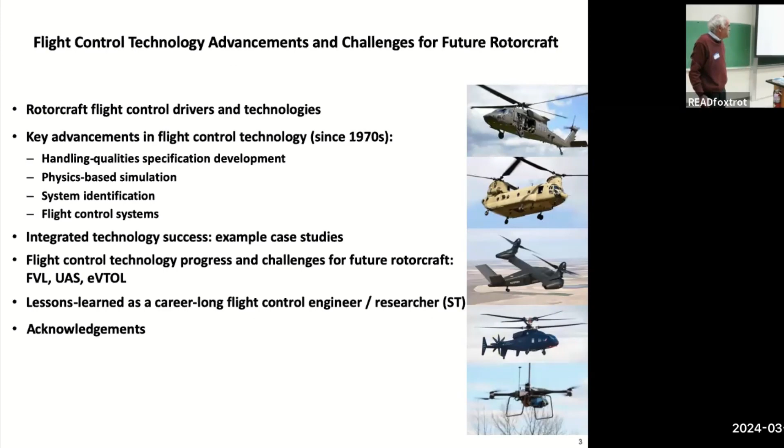This is an outline of my presentation. I'm going to march through this as I go, so I won't walk you through it here. The first topic will be rotorcraft flight control drivers and technology — what makes rotorcraft special and different from their fixed-wing counterparts?

A number of things: first, rotorcraft are high order, highly coupled — there are multiple dynamic systems that are dynamically coupled to each other. The aircraft has a lot of pitch-roll coupling, so it's not a single input, single output system at all. This requires engineers to have broad multidisciplinary expertise to understand how these things work together. The aircraft is also highly unstable and has significant time delays.

As a result of all this, if you look at it in terms of a Bode plot, we see this in the roll response — the rotor dynamics and the fuselage dynamics are in the same frequency range. What that means, if you look at it in terms of a root locus plot, is you have a second order system representing the fuselage and rotor dynamics. If you ignore the time delay, you think you can close the loop very tightly, but in reality there's another mode here called the lead lag mode.

There's a lead lag mode, and even for small amounts of time delay, the rotor will go unstable. So what that means is we need accurate models to do the design and development, and we need transparent design and development methods.

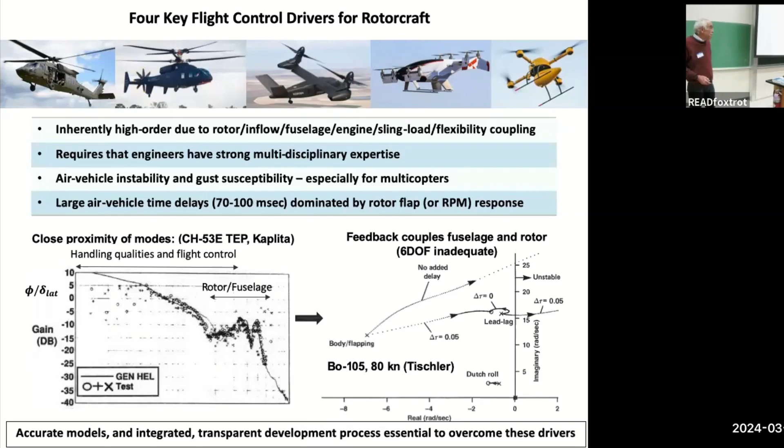So let's talk about 4 major areas of technology development over the last 50 years.

First area is handling quality development, and a good reference for this is a Nikolsky paper by Professor Padfield. Handling quality specifications basically define how you want the aircraft to fly to give you good response characteristics. Fixed wing folks came up with an update to their spec, called 8785C, developed in 1980. One of the big innovations was they moved from the time domain to the frequency domain.

In the rotorcraft area, we did the same thing, and proposed that we moved all of our specifications into the frequency domain. We had a lot of collaborative partners. ADS-33 was released after 20 years of work, so it was a very long process, and then the flight test guides came along.

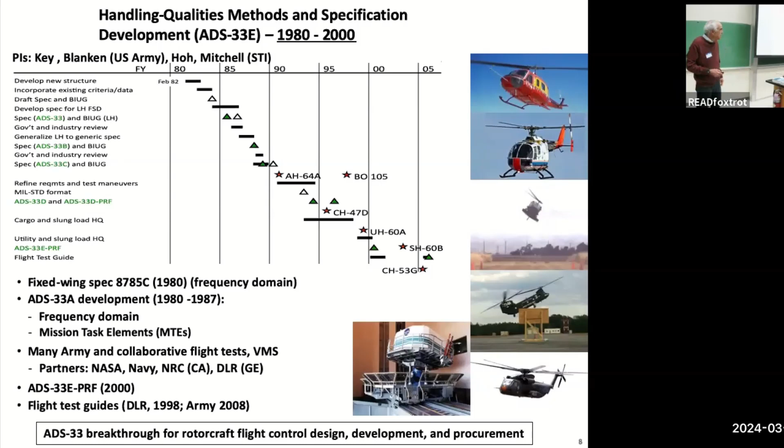ADS-33 was a huge breakthrough because it provided design guidance for folks wanting to figure out how the aircraft should fly, so that the pilot or control system will like the way it's operating. One of the first hurdles was moving into the frequency domain, and there were a lot of folks that questioned whether frequency domain characterization was applicable and practical.

So I was the first one to actually do system identification in the frequency domain on rotorcraft. It had been done in fixed wing, but not before rotorcraft. The first application was flight testing I conducted on the XV-15, and then following on the Bell 214.

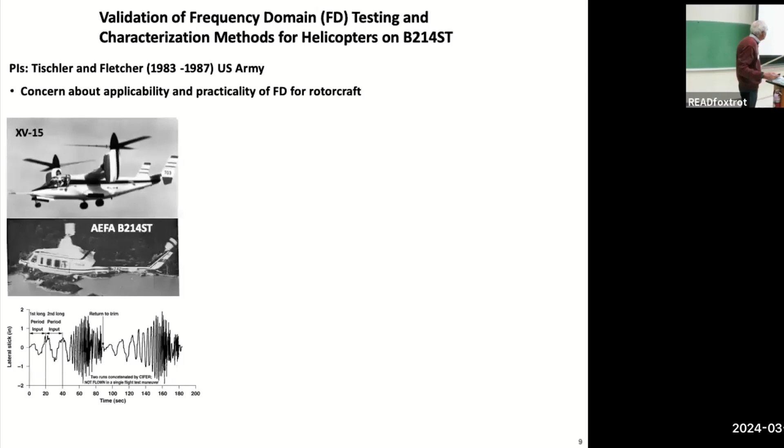What happens is you do one of these frequency sweeps. This one's pilot generated, but it can be computer generated. You get another one of these Bode plots, so you have magnitude, phase, and coherence.

Coherence tells you about linearity, and what it shows you is that the aircraft over a very wide frequency range is highly linear. That means the input to output response is quite linear. Now, it may have local nonlinearity, but if you look at it from the standpoint of a dynamic system, it's highly linear. Not only is it highly linear, but even though it's got a lot of dynamic modes, you can represent it over a very wide frequency range with just a simple second order transfer function.

When you do that, and you look at it in the time domain afterward, you can see that the prediction is very, very good. In the top right there, the model tracks the flight data very well.

Then you basically take this Bode plot and you can pull off some of the specification parameters like the bandwidth and the equivalent phase delay and so forth. These are how you specify the aircraft response characteristics. This demonstrated that we could use frequency domain characterization, and that's in fact how all handling qualities are represented now. The frequency sweep flight test manual told the flight test community how to do these tests in a safe way.

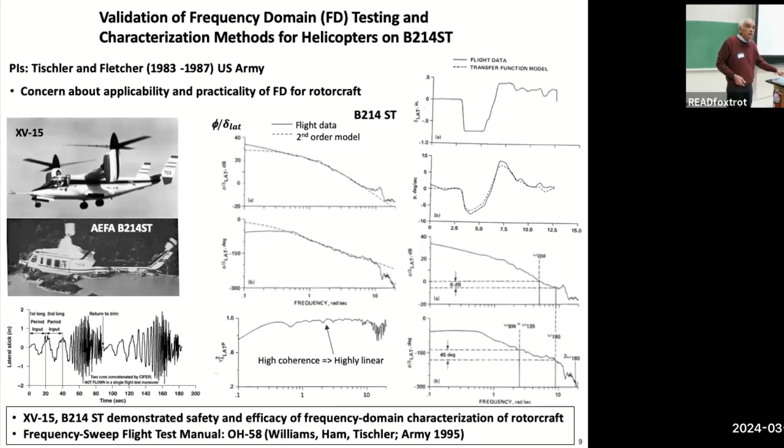The next major area we had to tackle was understanding the effect of time delay. The effects of time delay were very well known in the fixed wing community, and there was work published that shows that if you have about 120 milliseconds of time delay, the handling qualities start to break down.

What we're after is a Cooper-Harper rating, given by the pilot, of 3.5 or less. That's called level 1, or good handling quality. If you have large amounts of time delay, the handling quality degrades. The pilot is not able to fly it well, and he gets into what's called a pilot-induced oscillation.

The very first fly-by-wire aircraft is one that I worked on, called the ADOCS, and it had very large time delays. Sure enough, every time the pilot would try to do a high gain or aggressive task like a slope landing or a run-on landing, the pilot would get into a PIO, pilot-induced oscillation, and lose control of the aircraft, and the aircraft would trip offline.

So what that meant was we had to be very careful about these time delays. They are really fundamental, not only to the feedback system, but also to the ability of a pilot to fly it, or even an automation system.

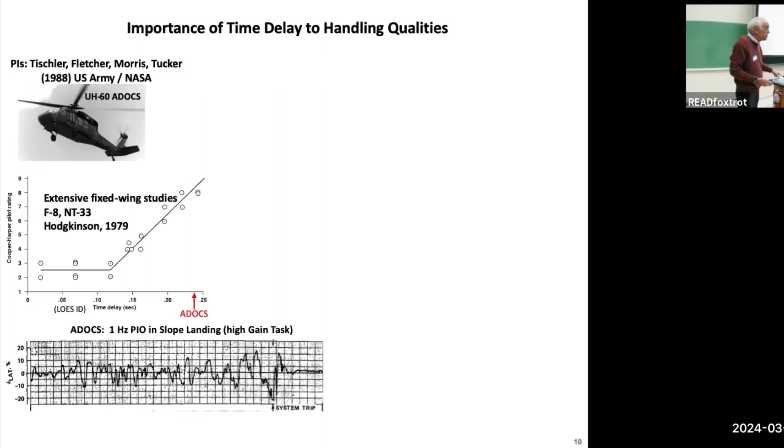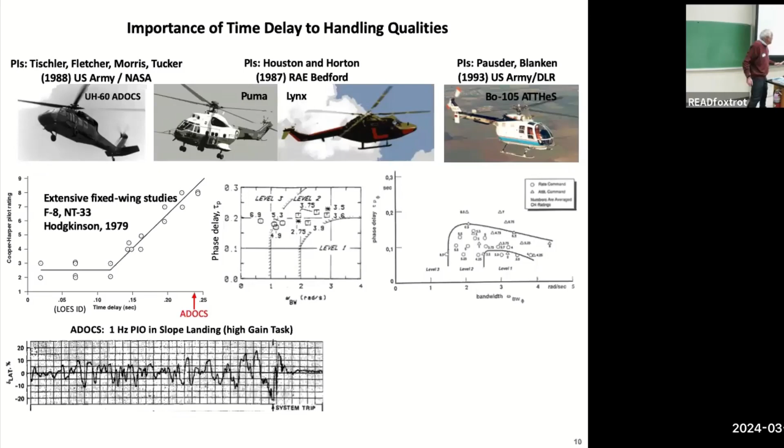There are other people in Britain who looked at parametric studies of the effects of time delay. Then there was a very good study done collaboratively between the Army and DLR in Germany, which indicated that the break point for time delay was 120 milliseconds, which actually lines up exactly with the fixed wing. You'll see throughout this talk many places where the fixed wing people started, then the rotorcraft community came along, and there was a great deal of similarity.

As a result of this, the spec emerged. Here's one of these specs I've been talking about. For example, you pull off the bandwidth, which is the point at which the curves roll off versus phase delay. Initially it allowed for very large time delays, 200 and 300 milliseconds, but eventually it was capped at 120 milliseconds, just like the fixed wing and rotary wing folks did. So you'll see throughout my talk that effective time delays are a big deal.

Time delays arrive not only from digital system delays, which are actually not the largest sources, but the biggest sources of time delay are things like the response to rotor RPM, if you have one of these air taxis we're talking about, filters, and especially the actuator rate limit, which creates a very large equivalent time delay.

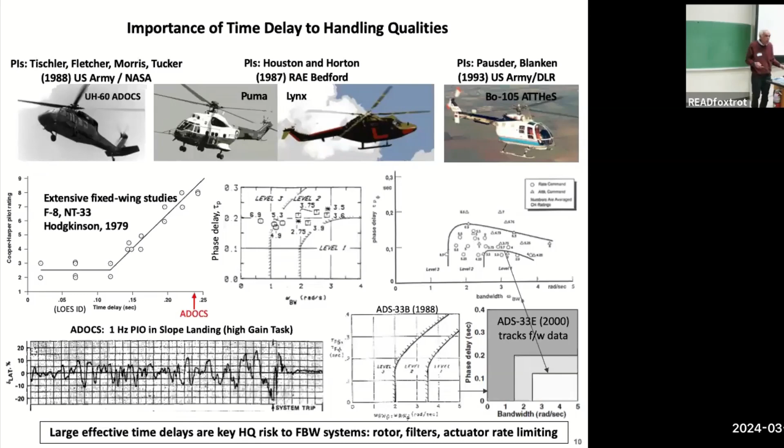The next important area was understanding the effect of disturbances on the aircraft response, and coming up with a spec to define how well the aircraft rejected disturbances and how it's positioned in space. What we used for this was the classic sensitivity function of 1/(1+GH), which you learn in fundamental control. You basically put a sweep into the hold variable.

In this case it was the roll angle hold. This is a control system - we're seeing a lot of what's called explicit model following, which basically holds the roll angle. If you turn the gain up, you measure the minus 3 dB point, and that defines what's called the disturbance rejection bandwidth.

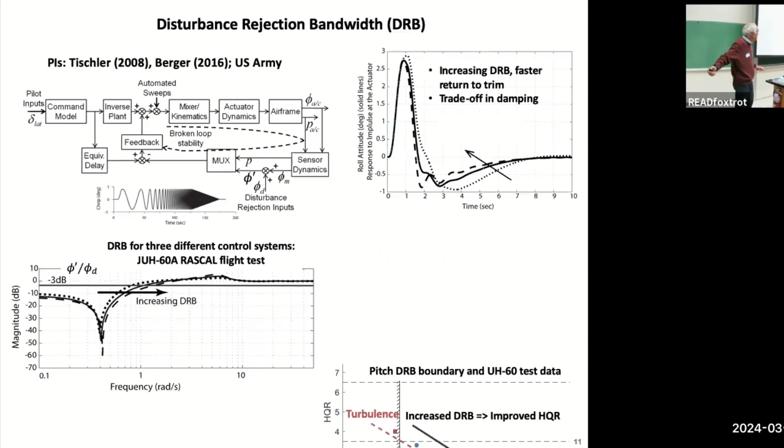This is a very good spec for characterizing how well the aircraft holds its trim and returns to trim. As you close the loop tighter, the curve moves across and you get more peaking, meaning it starts to become oscillatory. The aircraft will return to trim faster, but becomes more oscillatory - so there's a trade-off between speed of response and stability.

There was a very nice collection of results developed by Tom Berger at the Army. He showed that if you fly the aircraft in very calm conditions, you don't need much feedback gain or much disturbance rejection bandwidth. But as soon as you fly these rotorcraft in turbulence, what used to be a good aircraft - remember, Cooper-Harper rating 3.5 - becomes bad, and you can improve it to level 1 by turning up the feedback gains and making the aircraft respond better.

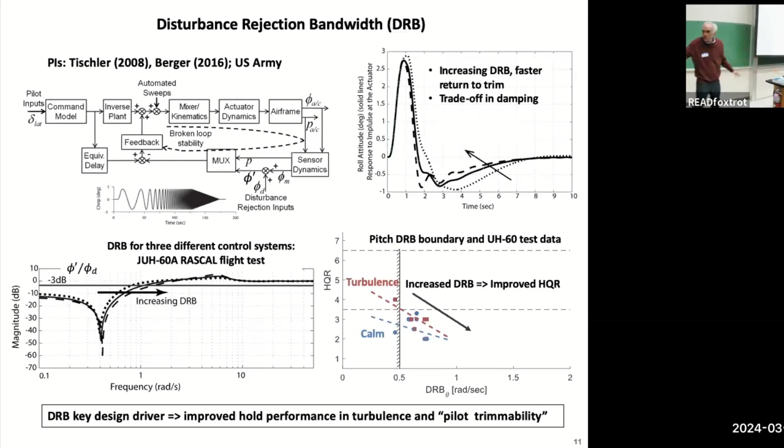So it turns out that this disturbance rejection bandwidth is a key driver for flight.

There were a lot of aircraft designed to meet ADS-33, the design spec. You see a wide number of these, both in the United States and, in fact, the very first fly-by-wire helicopter designed to meet ADS-33 was an NH-90. If you go online on YouTube, there are amazing videos of this aircraft landing on a Navy ship - a European ship in a very high sea state, very difficult conditions. They designed the aircraft to meet ADS-33, and it flew extremely well.

It turns out that not only military aircraft use ADS-33, but it's also being widely used for commercial aircraft. We'll see this as we go forward and start talking about eVTOLs - these new aircraft will also be designed to meet the same requirements, because this is really the only source of dynamic and handling quality requirements for rotorcraft.

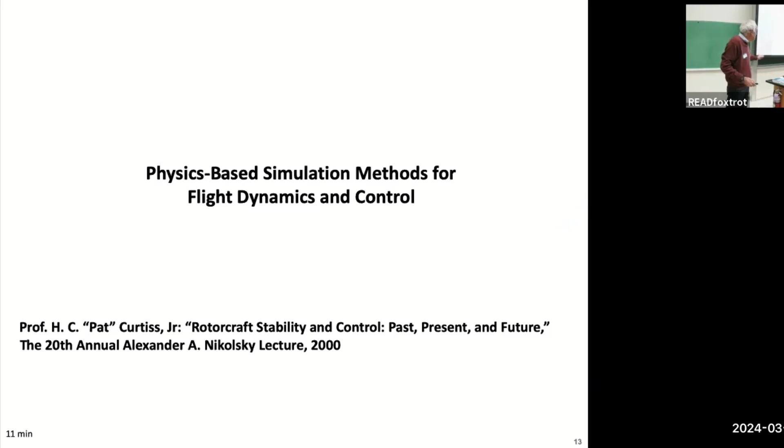Now I want to talk about the next topic, which is physics-based modeling. A good reference for this is Professor Pat Curtiss and his Nikolsky Lecture.

Physics-based modeling started out in the 1970s with what's called a tip path plane model. Bob Chen's tip path plane basically models the rotor as a disk, and you write very simple equations for the disk in space. This was a good starting point for not only real time but also offline flight control design, but it was crude.

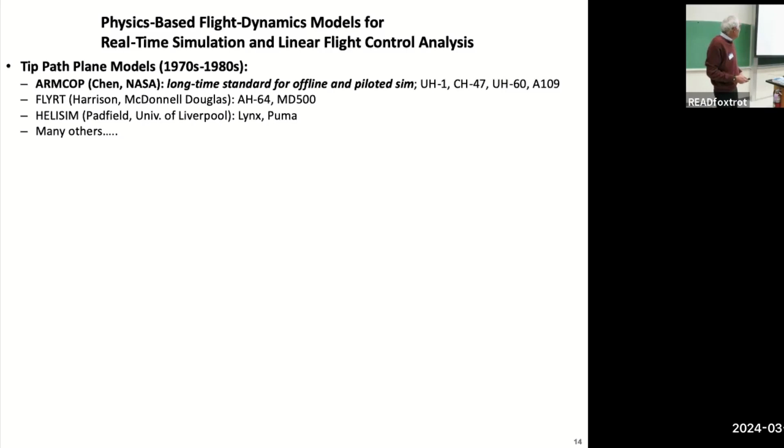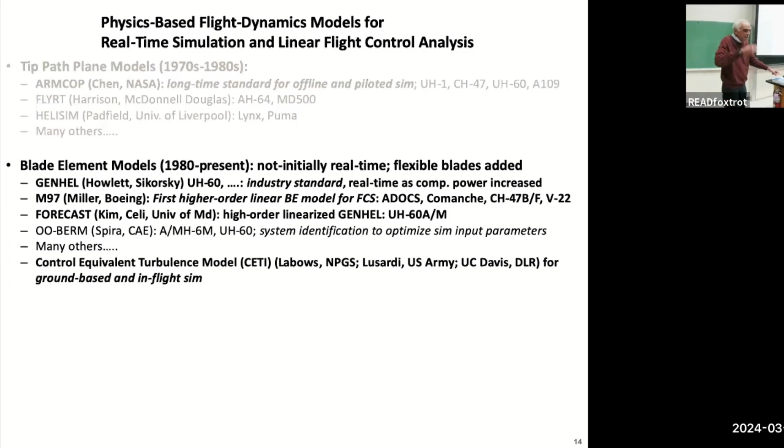The next series of models that came along were blade element models. With blade element models, you basically segment the rotor into a whole series of small elements and sum up all the forces and moments. The pioneer for this is a fellow named Jim Howlett from Sikorsky, who developed the GenHel program. Then Boeing came along and figured out how to linearize GenHel, which initially was only a time marching simulation. Eventually these models included flexible blades, and after that work, we actually linearized GenHel.

There are many other models. Another one is in Canada, a leader in simulation and pilot simulation is CAE Canada, and many others.

In addition to these models of the aircraft response, we also have to get models of how the aircraft responds to turbulence. This is important because of the Dryden model, which you probably learned about. It works in forward flight for fixed wing, and it works for rotorcraft in forward flight, but in hover it breaks down - in fact it blows up because it has velocity in the denominator. So we came up with the concept of a control equivalent turbulence model that basically feeds shaped turbulence directly into the actuators. We've seen this a lot because turbulence is one of the main drivers for control system design and work.

The next major development was incorporation of higher order aero. We started out with things like what's called prescribed wake, where you have the rotor shedding a wake, and you can assume it has a certain form that makes it prescribed. This allowed researchers from the Technion in Israel to understand the angular cross coupling, which had to do with wake distortion.

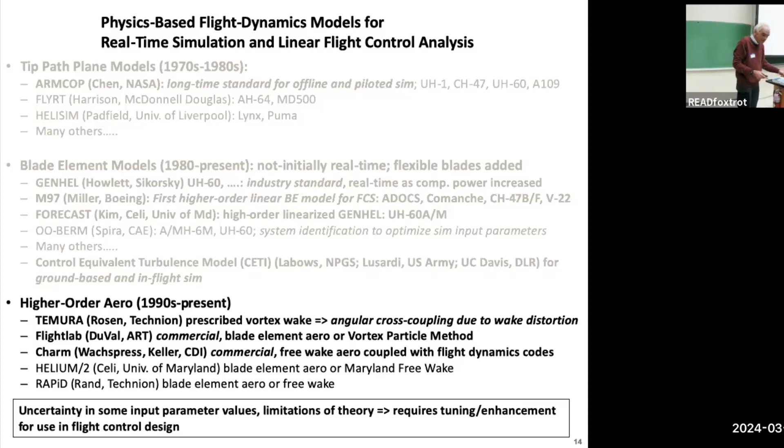And you really can't do it in the time domain. Originally, that's the way people would look at it, trying to look at these wiggly curves and see how close they were - it's very hard to do. If you look at the frequency domain, you can look at it frequency by frequency, and it allows you to understand what the accuracy of the model is and whether you're improving it.

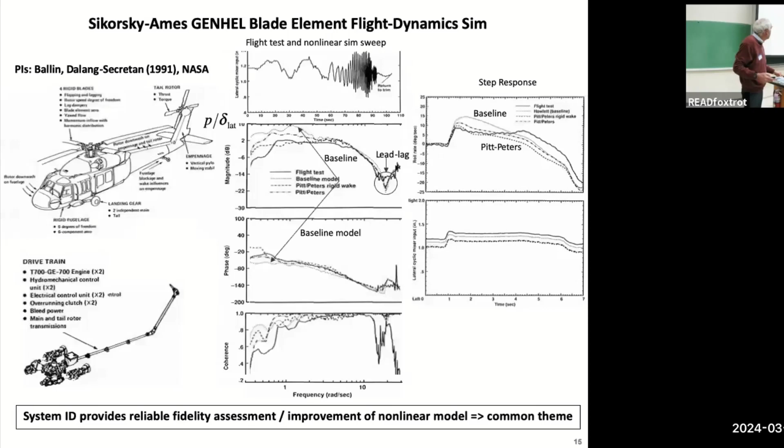The next area of simulation modeling I want to talk about is what's called a stitch model. If you do the system identification, one of the results is that you can extract the state space model of the aircraft. So not only do you get the Bode plots, and I'll talk about this in a moment, you get stability derivatives, but you can also get stability and control derivatives from a nonlinear simulation. You have to do numerical perturbation and linearize the equations of motion. Basically, you can build a lookup table in which the ABCD matrices are stored as a function of velocity, at several discrete points.

You make a lookup table of the stability derivatives, the control derivatives, and the trim data. Then all you have to do as the aircraft flies in simulation is tell it what speed you're at and what your control is, and it calculates the forces and moments. It adds to the aero forces the gravity forces and moments, and then drives the equations of motion. This is very effective and widely used now as a way of building simulation models when you don't have a physics-based model.

A lot of companies are doing this—companies like CAE and NRC—they just instrument the aircraft, fly it, get system ID results for several point conditions, and then build a lookup table and interpolate it. These are called quasi-linear parameter varying—basically linear at the anchor points, but interpolated in between.

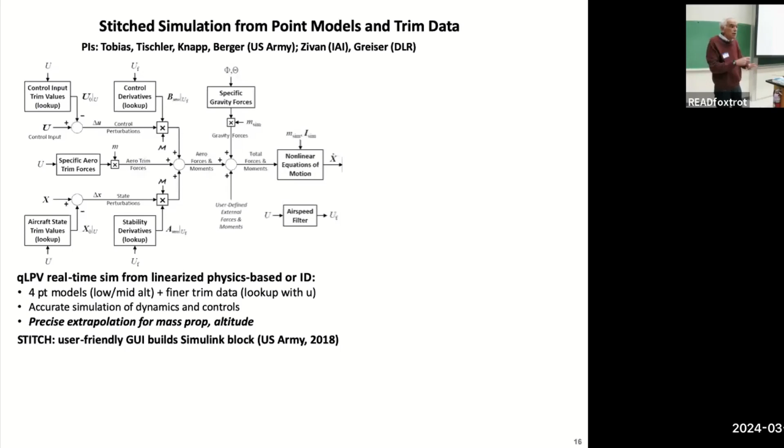We developed a tool called Stitch in the Army, which builds these for you automatically. One of the nice things about this is it allows you to do precise extrapolation for changes in mass, CG, and moment of inertia, so you don't have to test it for every one of those points. You only have to test 4 velocities at low altitude and 4 velocities at mid altitude, and you can characterize the entire envelope of the aircraft and build an entire simulation.

Here's an example of how accurate this is. Using the GENHEL model, which we linearized, we had essentially a truth model. We flew the nonlinear simulation from hover forward to 100 knots, turned back to hover, and compared that with what we'd get using one of these Stitch models, the linearized point models. It's essentially perfect—there's a small offset in actuator, but all the dynamics are perfectly modeled. So you can represent these very complex systems with a very small number of point models, and it works extremely well.

As I said, this is widely used in development of training simulators, and it's really ideal for UAVs, because UAVs are changing so rapidly that it's much easier to go out and fly it, do system ID, and build yourself a lookup.

There was a lot of work in a working group that I led over a 4-year period, involving multiple NATO countries and a wide variety of aircraft, looking at how to assess the fidelity of simulation models in the frequency and time domain, and then how to improve them. If you're interested in this topic of figuring out how to assess fidelity, this is a good open literature report—you can Google it and find it online. It goes through a variety of methods, from very simple to very complex, explaining how to assess and update.

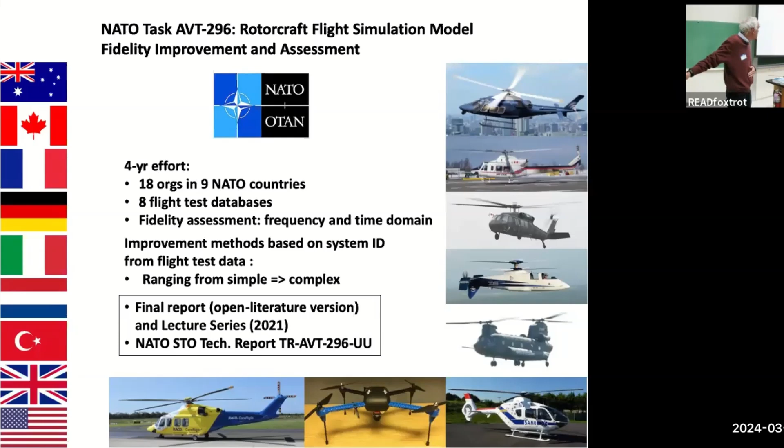I want to switch now and talk about system identification. I've introduced you a little bit to what it is, and a reference for this is my textbook on the topic. System identification basically has you excite the aircraft, measure the excitation, the control, the actuator input, and the aircraft response, and it extracts equations of motion. That's what system ID is.

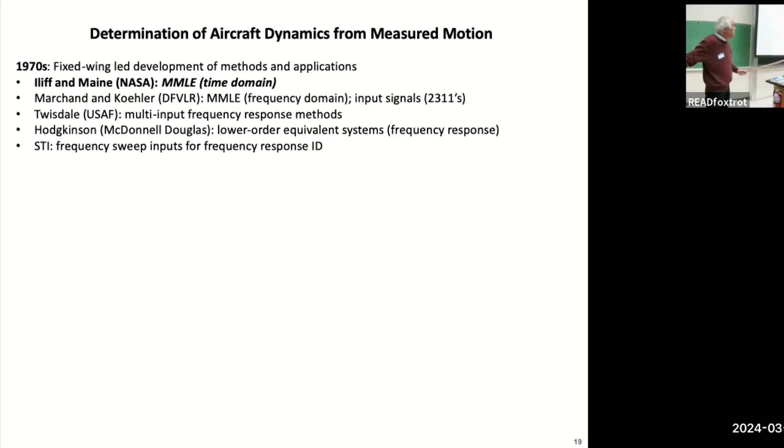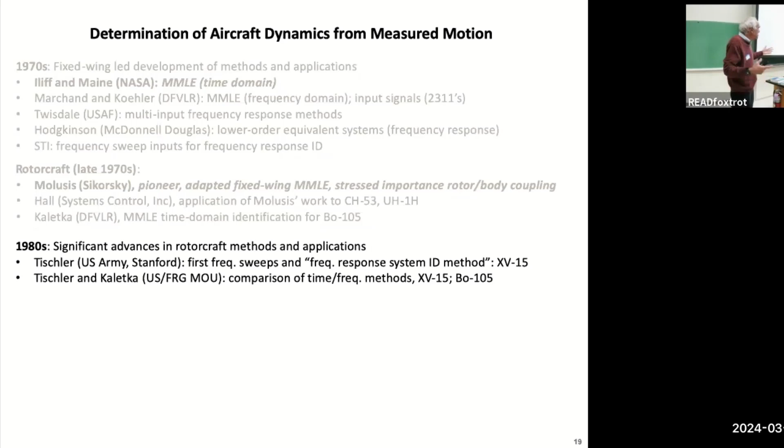System ID came along—fixed-wing people had a big jump on us at NASA, through 2 pioneers called Iliff and Maine. At NASA Dryden, they developed a time-domain method called MMLE. This was later applied to rotorcraft in the time domain by Molusis from Sikorsky, and then others in Germany and industry. I came along in the 1980s when I joined the Army and was the first to use frequency sweeps, developing a method called the frequency response system identification method. I applied it initially to the XV-15, and then many other aircraft, including the Bo-105, and a very large number of aircraft since—it's probably the largest, single most widely used approach now worldwide.

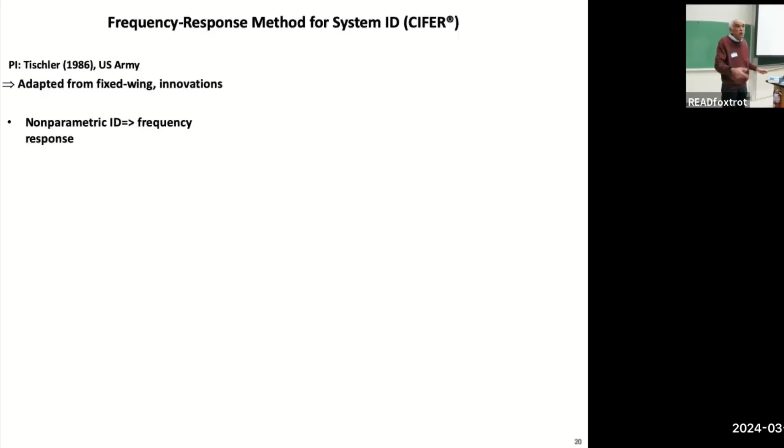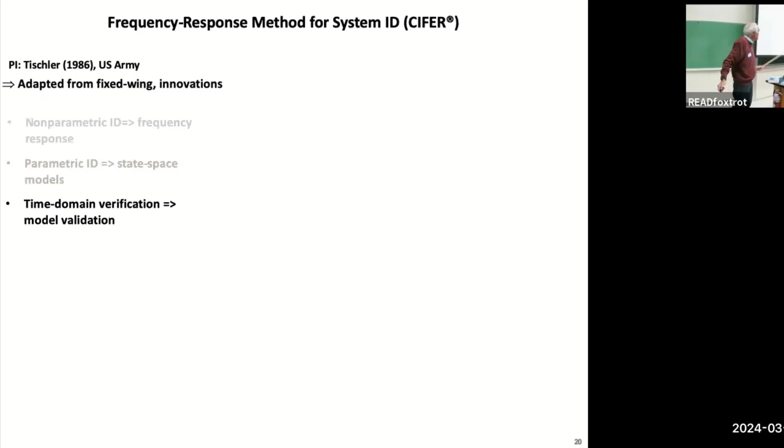I essentially adapted a lot of these methods from fixed wing, who had done frequency domain system identification for fixed wing, but never in rotorcraft, and I had to introduce a lot of innovations to make it work for rotorcraft. Basically, you get these Bode plots, which I've already shown you, and you get essentially a multi-input, multi-output frequency response matrix. Then we use an optimization algorithm to extract state space models from that, and then you check it in time domain. So that's the basic approach.

It has a lot of advantages over the time domain methods which I talked about, and that is it works on unstable systems, whereas a time domain method, which in time marching will blow up because the aircraft open loop dynamics are unstable. All hovering vehicles are unstable, all rotorcraft are unstable. It also handles widely spaced modes, including structural modes, and it gives you a model that tracks the responses best in Bode format, which is really important for flight control.

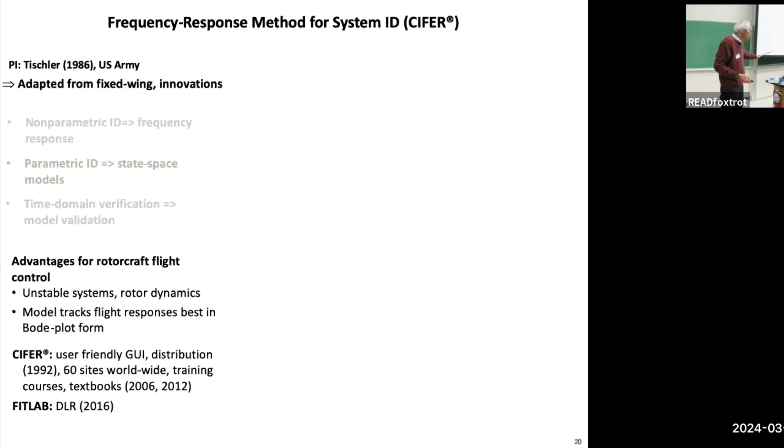Because all flight control design now, whether it's SISO or MIMO, is all done based on Bode plots. And so we embodied this approach in a tool called CIFER. It's really the only commercially available tool. It's widely used, about 60 sites worldwide. I've mentioned my textbook. I gave a 4-day short course for AIAA online, and if you're interested, that's available on demand.

And the data is the solid line again. Again, you see magnitude, phase, coherence. Coherence is very high, which again indicates the input to output map is highly linear. That's very important - even if you have a lot of local nonlinearities, the input to output can still be very linear.

Then you extract a state-space model. This just shows you one of the responses, but you typically have about 36 of them in total, 4 inputs 9 outputs. And you get a state-space model which tracks that. It agrees very well in the frequency domain, and then you can check it in time domain.

And what's really important is, you can see here, these are large responses. We're talking about maneuvering flight, plus or minus 20 degrees per second. So this is not small perturbation motion. This is maneuvering motion, okay?

And so this approach to extracting models is very, very useful. You can also use it to validate your control system. So in this case, we just represented the equations of motion as a 6-degree of freedom, your classical equations of motion, and we represented the rotor as a simple time delay model. And that worked out fine, and this led to significant reduction in the development of the ARH aircraft.

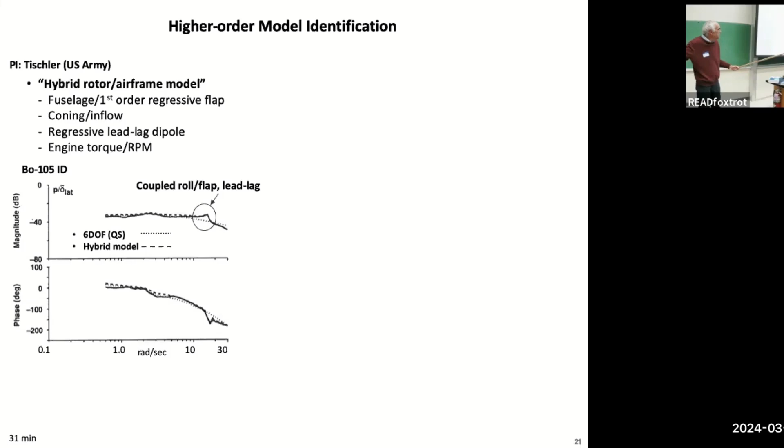And I proposed a model structure called a hybrid flexible model, which basically allows you to merge and combine the equations of motion for the structural flexibility with the rigid body equations of motion into a single set of equations, and then you can use this identification to track that.

You can also use the same approach to combine NASTRAN models with rigid body state space models, which is very useful because typically NASTRAN models work at high frequency where you have structural dynamics, but they don't do very well at low frequency, and the rigid body equations work at low frequency, but they have no structural dynamics. So this approach allows you to merge the two sets of dynamics and use them together.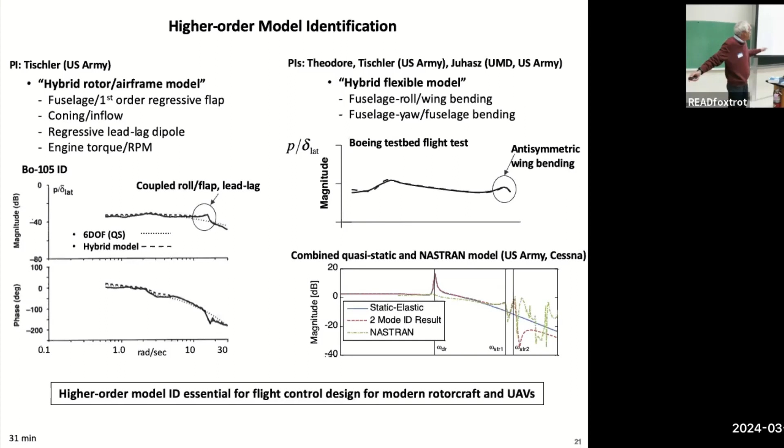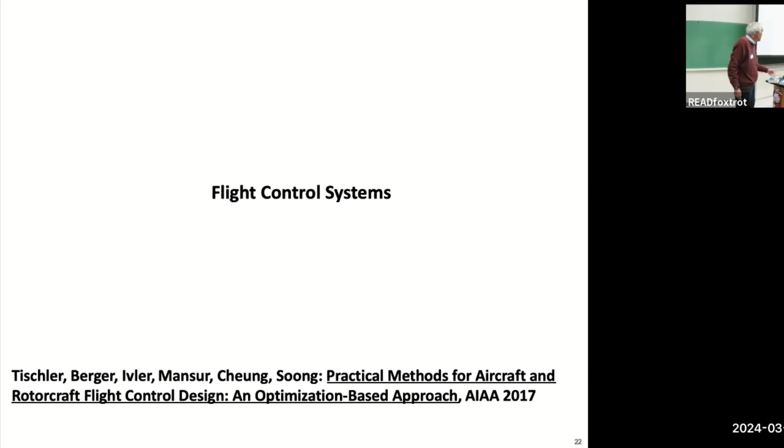All right, so now we have very accurate models. So now what do we do with it? Well, now we want to design a flight control system. And for that, there's a textbook that I wrote with my team at the Army, and this is a useful reference, and we talk about development of flight controls.

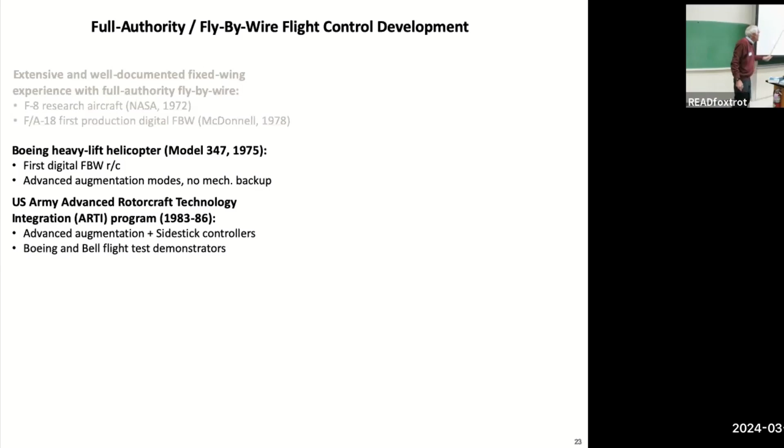All right, so once again, the fixed-wing folks were way ahead of us. They fielded the first digital fly-by-wire production aircraft in the F-18 in 1978. Boeing came along very quickly for rotorcraft and flew a digital fly-by-wire on a demonstrator called the Model 347. And then the Army had a technology demonstration program called the ARTI program, in which they demonstrated advanced augmentation and side stick controllers. But the big breakthrough came with the development of explicit model following.

Explicit model following basically has a regulator loop, which is here, the feedback loop. You have a simple inverse model of the aircraft in the forward path, and then a command model. So basically, it rejects disturbances through the regulator loop, and then it predicts how the aircraft is going to respond and inverts it with this simple inverse plant.

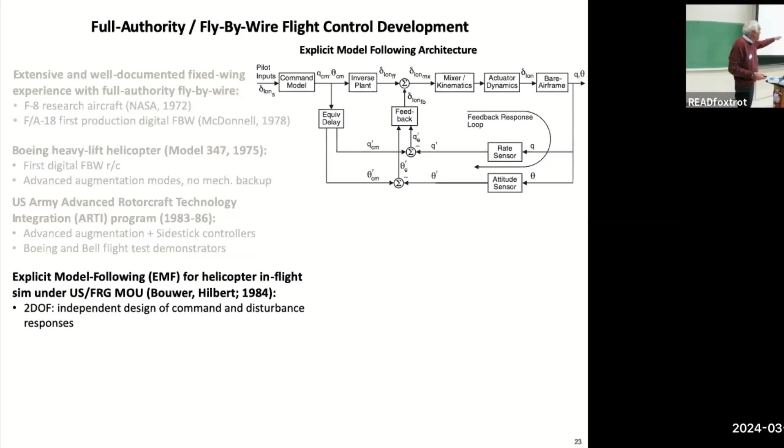Now, people use nonlinear dynamic inversion. The downside of that is that the inverse shows up in the feedback path. And what that means is that if your inverse is wrong, it'll affect stability, and that's not a good thing. So they have to work very hard to get an accurate model, whereas we can use a more crude model, a lower order model. This was developed by researchers at Ames and the German establishment, and allows you essentially independent design of the feedback path separate from the response to command. So that's a big deal.

And this was worked out in flight in an aircraft called the ADOCS. I showed you that earlier in the presentation when we talked about time delays. So the ADOCS was the first production representative fly-by-wire demonstrator. It's a big breakthrough, and it used explicit model following as a way of meeting these ADS-33 response requirements.

It allowed for very simple and transparent design. It had a lot of advanced features, including advanced command models and pilot selection modes. And since this demonstration, explicit model following is essentially ubiquitous. I don't know of any fly-by-wire rotorcraft today that doesn't use explicit model following.

And just I show it to you in here. And so this is good. It retains a lot of the classical aspects of feedback control, but it allows you to easily set up the system to follow any of the specifications. So this is something that as students it's really good to learn about and learn to do.

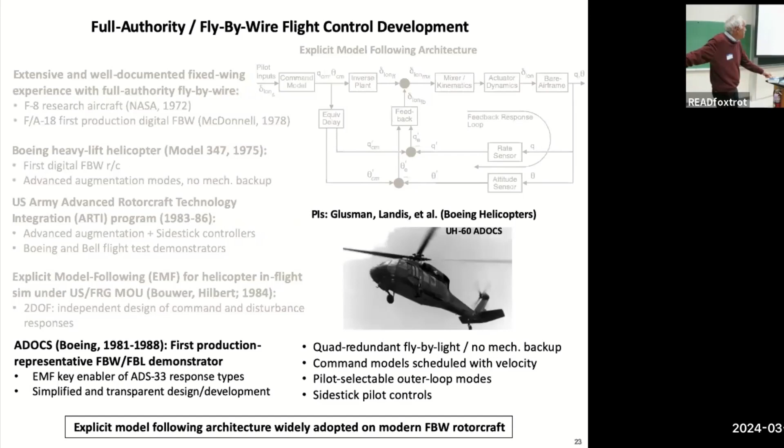All right. Okay, there we go. The next step, once you have the architecture, is to figure out how you drive that architecture to meet the handling quality requirements I talked about in the previous section. So we have things like stability margin, disturbance rejection bandwidth, speed of response, which is called bandwidth. We have all these specs, typically about 30 or 40 specs at one flight condition, and you want to drive your design to meet all these specs simultaneously.

And a very efficient way of doing this is using optimization. So the idea is that the user specifies the architecture, like explicit model following or something else. He specifies and chooses the specs from ADS-33 and some of the other locations. And then you use Pareto optimization to essentially drive the control system to meet all the design requirements with the most efficient use of the actuator. So this is a very smart way of doing control system design, direct optimization.

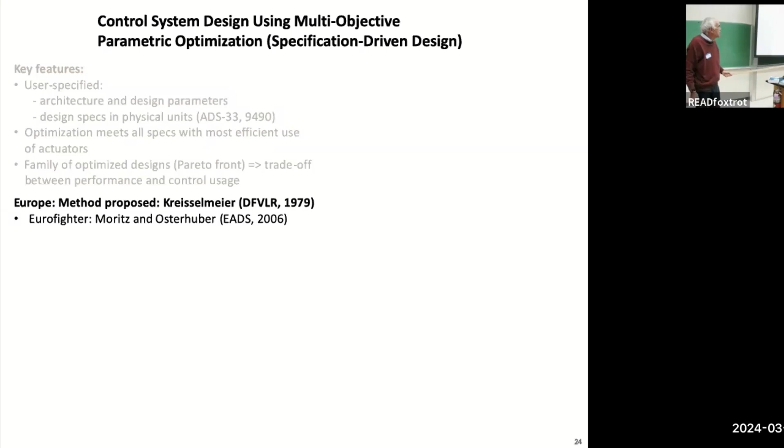This method, once again, was developed on the fixed wing side, and it was developed in Europe for the Eurofighter, which was developed very successfully using this approach. And then I came along and led a long research activity that spanned about 15 years, and we developed a tool called Conduit, which is essentially a one-stop shop that gives you libraries of all these specs.

You can import them. It's coupled to Simulink, and all you have to do is you tell it what your control architecture is. Could be LQR, could be H-infinity, could be explicit model following, or simple PID. And then you say, okay, what are the design parameters like feedback gains or Q and R matrices in LQR, and it will optimize the system to meet the requirements with the minimum amount of overdesign.

And that's a tool called Conduit. And that's, again, very ubiquitous. It's the only commercial tool of its kind that does direct optimization for a wide number of specs. That's really developed for aircraft applications. We've used it for aircraft and rotorcraft and UAVs and all manner of vehicles. Again, there are about 50 sites worldwide. It's in widespread commercial distribution.

And I'll teach a course with my colleague Tom Berger in December through AIAA. It'll be available in real time as well as on demand. And again, there's a textbook. Okay.

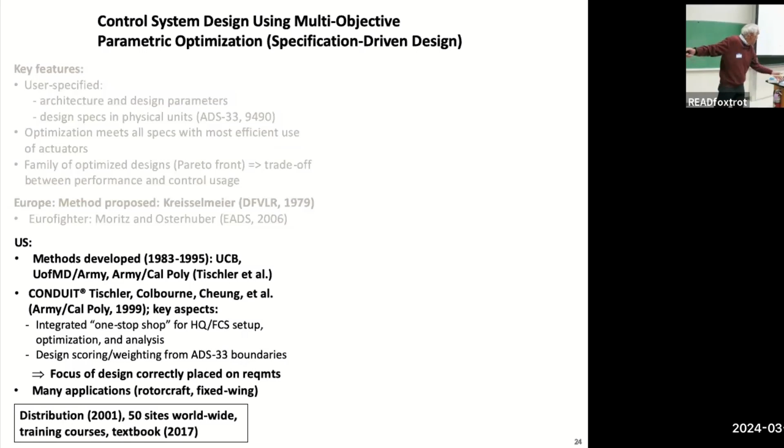So here's an example of how this works. This is the K-Max aircraft. It's a very interesting machine, a synchrocopter, almost like an egg beater with two rotors that intermesh. And a very successful aircraft.

The Marines had a project with Kaman Aerospace to make it unmanned and use it for payload delivery to the troops. I worked with them, and my team worked with them, and we were given information about the actuators, saying they were relatively fast, about 95 milliseconds. When we put that into the design and flew the aircraft, it was essentially unstable.

We said, okay, what's going on? The main uncertainty was the actuator dynamics. We used the specs provided by the manufacturer, but when we measured it, the actual time delay turned out to be about 290 milliseconds. So it was huge, right? 200 milliseconds worse. First of all, you never trust the manufacturer's definition of their actuator.

Once you dial in this 290 milliseconds and optimize the system, it flew beautifully. So what this says is that, just like in handling qualities, time delay is a key driver for flight control system design, and it must be accurately determined from the system. So here's a real success story.

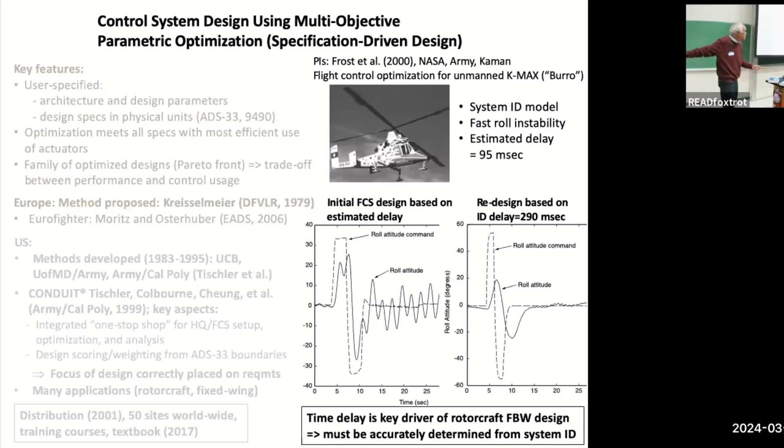I want to talk about how to combine these various technologies I've been discussing, these four technologies, and show you one example case study: a great aircraft developed by Sikorsky called the CH-53K. It's the first U.S. production fly-by-wire rotorcraft. It's a very large aircraft with a great deal of structural flexibility, so they needed to include the Nastran modes in their physics-based model, and then they used system ID to validate it.

Here's their GenHel model, including the structural dynamics, and here is the flight test data. You can see very, very good agreement. Once again, system ID provides the truth data you need to judge things as a function of frequency. At low frequency, it looks very simple, just a first order or second order response. At high frequency, you have all these structural modes, and that's very important for determining where to put the sensors so they don't pick up the structure.

The CH-53 was flight tested and fielded, and they flew it in a wide variety of conditions. It has a great deal of augmentation, all designed initially with Conduit, and they flew it in really difficult conditions.

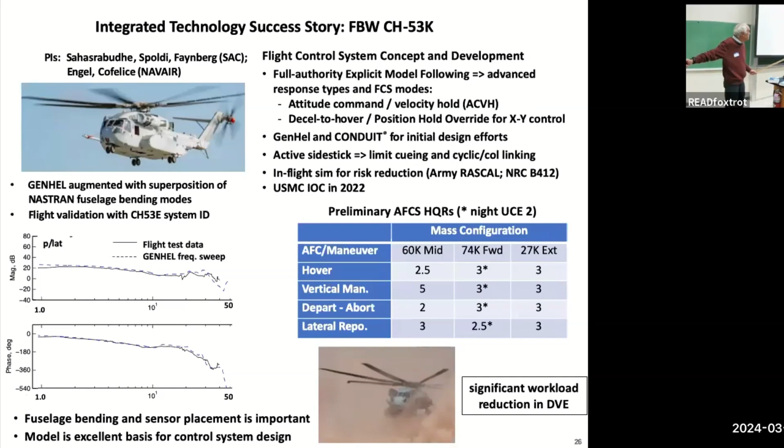Now what I want to do is move from where we've been to where we're going. I know that's a big reason folks are here and online, and I want to talk about a variety of different aircraft.

The first one is the Army's Future Vertical Lift. There are two classes of aircraft. One is a replacement for the UH-60, a conventional troop transport aircraft, and the replacement aircraft is called FLRAA. The winner of the competition is Bell with their advanced tiltrotor V-280.

The FARA program, intended as a replacement for the Apache, was in fact just canceled last week, unfortunately. We don't really know what the future is going to be, whether these prototypes will be carried on by the manufacturers. But I have results which speak to these configurations, which are interesting beyond whether the Army picks them up, as they may be offered for other competitions. So let's first talk about the results for the V-280.

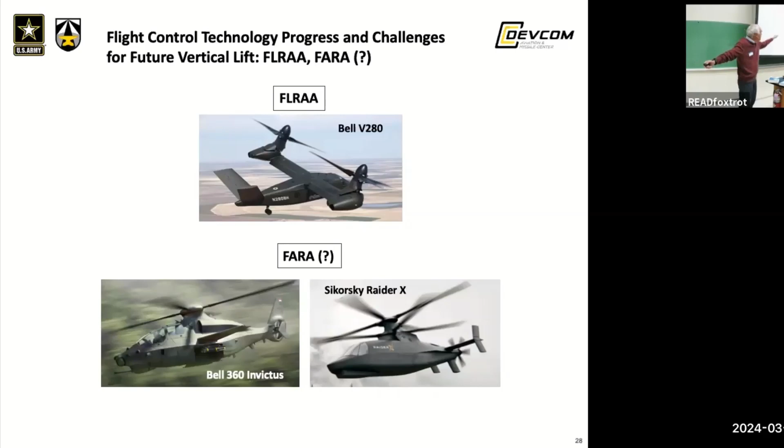And so this is the aircraft right here. They did flight tests. They swept their system integration lab, which is essentially a hardware-in-the-loop laboratory. You can see very good agreement - magnitude, phase, coherence - this is the roll rate response. You can see that the physics-based model and the hardware-in-the-loop simulation tracks flight data very closely.

You can basically take the difference between these two curves and get an error function. When you're within these boundaries, which are defined within that NATO report I mentioned, you meet the requirements, and it says you have good fidelity. Then there's some squared cost function, and that also meets the requirement. So this validated the V280 model for flight control design and for handling qualities.

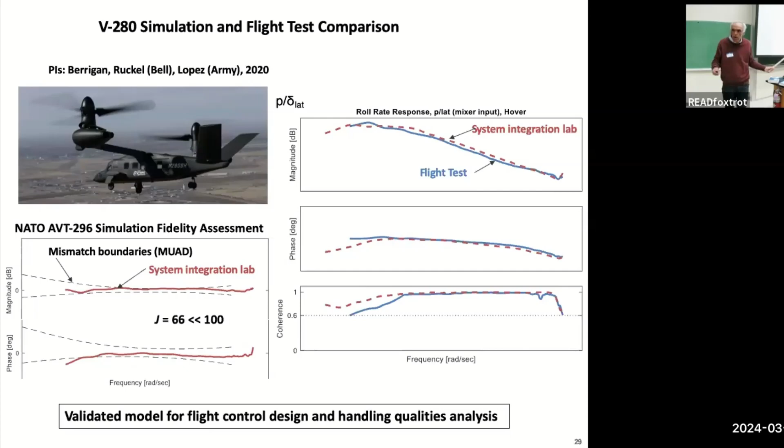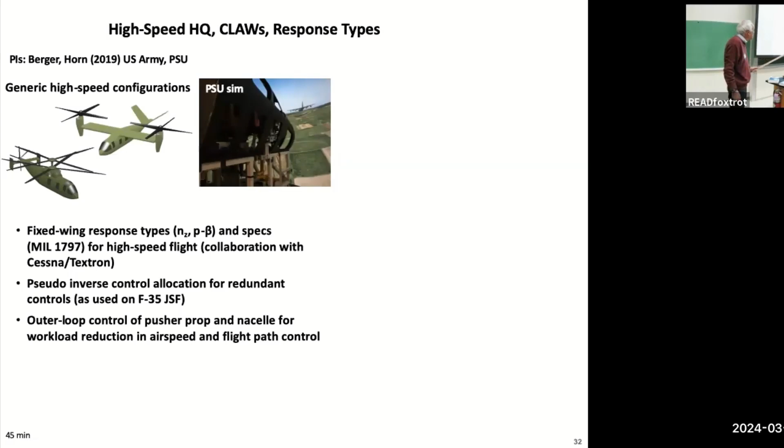Tom Berger from the Army, now the Army Rotorcraft Flight Control Technology Group Leader, has done a series of simulation experiments looking at high-speed rotorcraft handling qualities. At high speed, rotorcraft dynamics look a lot like fixed wing, so he asked: how well can these fixed wing specs predict handling qualities?

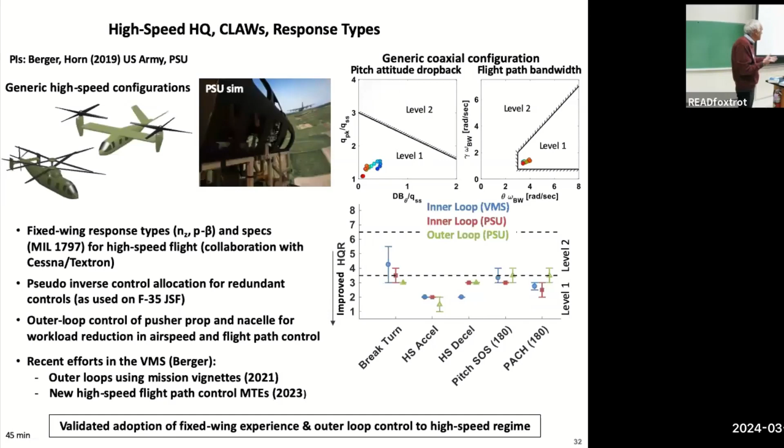If you look at these two aircraft, they're in the level 1 region in terms of the fixed wing specs, and then you flew them for a variety of different maneuvers, and sure enough, they're all in the level 1 region. So it proves out the adoption of fixed wing handling qualities for high-speed regime. Even though you may be working in rotorcraft, there's a lot to be gained from understanding fixed wing experience. There's a lot of crosstalk between the technologies.

There are many additional highlights I don't have time to cover, but they are covered in my written paper—things like rotor state feedback and some advanced specs included in ADS-33, and a really cool demonstration of damage tolerant control when you have redundant control surfaces, which is very common on these eVTOLs. You have more surfaces than degrees of freedom, and this allows you, if one fails, to reconfigure. What Sam did together with Piasecki, one of the rotorcraft companies, is demonstrate this ability to reconfigure on the fly, damage tolerant reconfiguration, with a scale demonstrator.

It's really cool, but there still remain many upcoming challenges. We don't have the flight test results from these demonstrators I was showing you, the V280 and some of the other demonstrators that were developed—they're all proprietary, so that's a problem. We need to include these lessons learned in the mil spec, and also the development schedules are really compressed. There's this idea that we're going to let a contract and they're going to be fielded very quickly, and the only way that's going to happen is by minimizing the flight tuning of the control laws using these advanced methods like system ID, getting the right mil specs, having an accurate model, and then using a good design method.

Let's go on to the next point: if we're talking about conventional single main rotor and tandem rotor helicopters, sort of classic legacy aircraft, we're probably at the 90% point in terms of flight control technology—there's not a whole lot of research that needs to be done. But if we're talking about these new configurations, which you see not only for military configurations but also for eVTOLs, I think we're only at the starting gate. So there's a lot of opportunity here for research and for students to learn these technologies and apply them as we go forward.

The next class of aircraft are existing fielded piloted aircraft which have been turned into UAVs or drones. You see a variety of them, including the K-MAX, and there are a number of these that have been fielded. I'm going to focus on the Fire Scout, which is one that I worked on personally along with some of my colleagues.

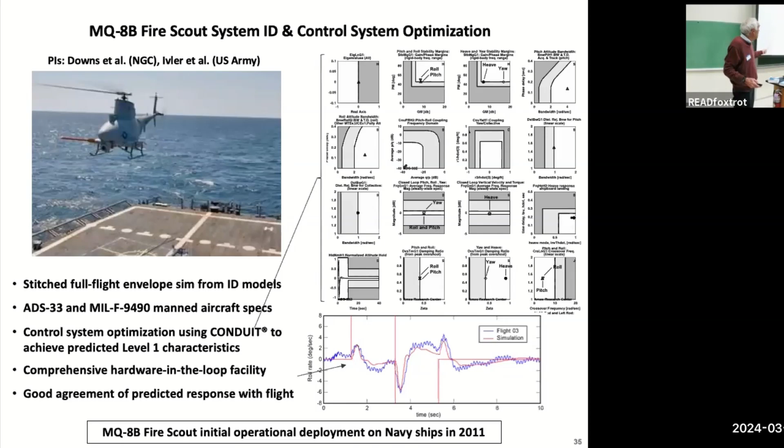We have a very valid model—as you can see, the simulation tracks the flight system very well. The Fire Scout was designed this way, and it was operationally fielded on Navy ships about 13 years ago. It's been a very, very successful aircraft using these technologies.

The K-MAX also did not have a physics-based model. It used cable angle feedback, measuring the cable angle relative to the vehicle and feeding that back. It had a very sophisticated control system, and we did all the simulation modeling using system identification and Conduit to do all the flight control optimization.

It was fielded in a 3-year operational trial in theater. There were thousands of delivery missions to soldiers who needed replenishment of supplies, and it was very successful.

There have been many other flight demonstration programs confirming that ADS-33 is good guidance for these unmanned aircraft, because they're originally based on piloted control. The control system is only going to be, at best, as good as a good pilot. It's never going to be better, probably. So if we give it good pilot handling qualities, it's going to give it good flying qualities. There's also a lot of work on autonomous guidance navigation, like flying around obstacles, done by the Army as well.

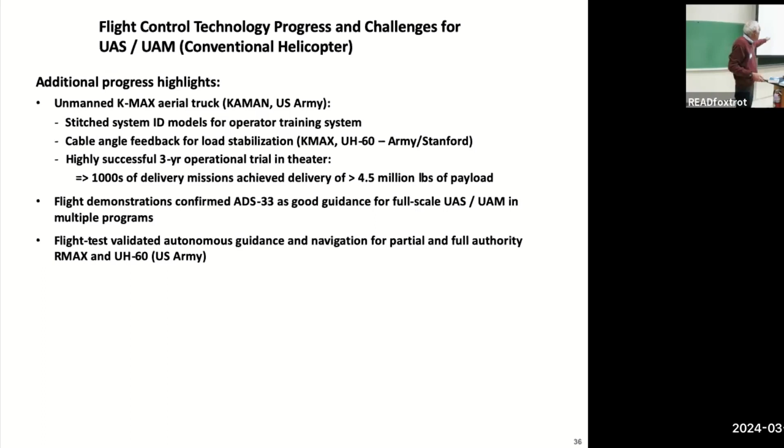Yet there are many challenges. One key challenge I want to highlight is not only for shipboard operation, but for rooftop operations. A lot of these eVTOLs have their concept being going to land on a rooftop.

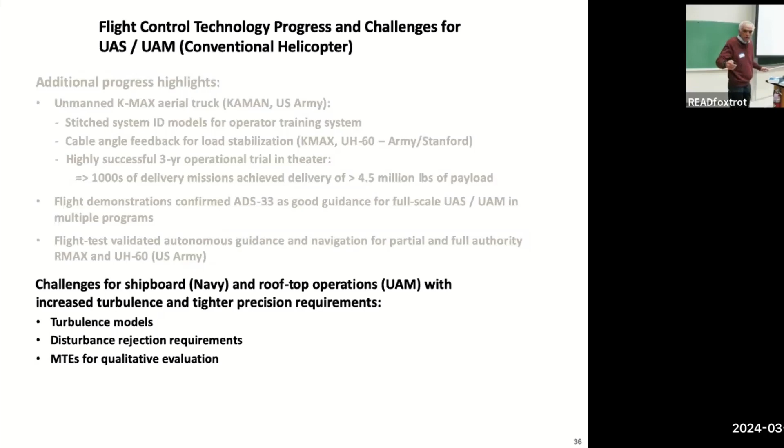That sounds good, it keeps you off the ground, you don't have noise problems, and so forth. But if you look at some high-rise buildings in San Francisco, it can be totally calm at street level while the flag is standing straight out up at the top of the roof, shedding all kinds of vortices. So we have to understand turbulence models for this environment, the right control system design requirements, and the right kind of evaluation.

So the next class of aircraft are small eVTOLs for surveillance and for package delivery. This is just a small sample - there are many such aircraft around.

The first application of system identification and flight control design methods developed for large scale and applied for small scale was done by Wei. One of the interesting things we found, which you'll find on all multi-rotors, is that these vehicles are dominated by speed stability.

What that means is that if you translate forward, if you develop a perturbation in U, you get a very large pitching moment. So the aircraft will pitch backward, then go backward and pitch forward, producing a very unstable aircraft. This is very different from aircraft which have flapping rotors.

With flapping rotors, these derivatives are small and the rate damping is large. Here, there's almost no rate damping - it's dominated by these terms, and it's such a big deal. It not only gives you an unstable, very unstable aircraft.

Anybody that flies one of these DJI or other quad rotors knows that if you turn the control system off, the vehicle is totally uncontrollable. I don't know if anybody flies small RC drones and multicopters - they're totally uncontrollable, and that's the reason.

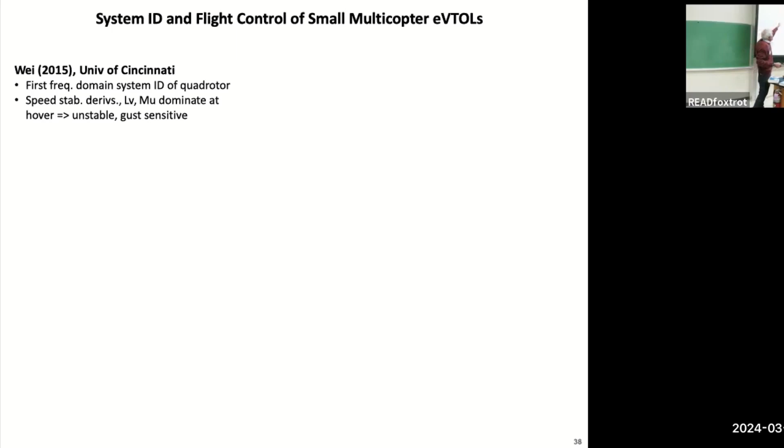Not only do these derivatives make them unstable, they also make them sensitive to gusts, because if you have a U gust, the aircraft is going to run away from the gust. That makes the aircraft very, very sensitive.

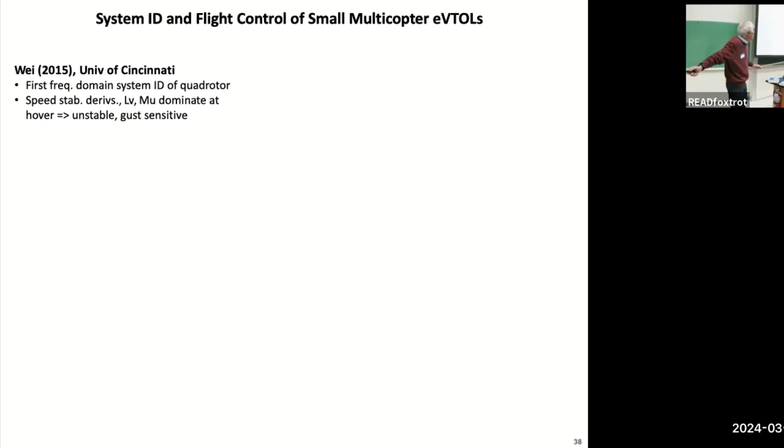So the Army came along, and Kenny Cheung and my group led a significant program to evaluate the full range of technologies applied to an Iris Plus, which is a small multicopter drone about a meter across.

One of the things he did was extract the turbulence model and then use that for flight control design. Here's the stabilized mode - anybody who's worked with these, for example, the Pixhawk system which is widely used, has an auto-tune mode called stabilize. This is how it holds hover.

Not very good. It's plus or minus 3 feet in all directions. It's all over the sky, right?

But now, if you take this model we've identified using system identification and Conduit and optimize the control system, it's like somebody described it as nailing the aircraft in the sky. It doesn't move. You can make these aircraft fly very well.

The problem is not the aircraft, and it's not the control system - it's the way in which the control system is designed. The Ardupilot is just not a very good control system. It's a very good sensor package, but not very good control.

One of the things that Marcos Berrios and my group did was show that with these small aircraft, the disturbance rejection bandwidth I talked about was critical. Basically, if you turn up the disturbance rejection bandwidth, you get tighter and tighter disturbance rejection, and the aircraft holds its position smaller and smaller - so go from 3 feet down to 1 foot.

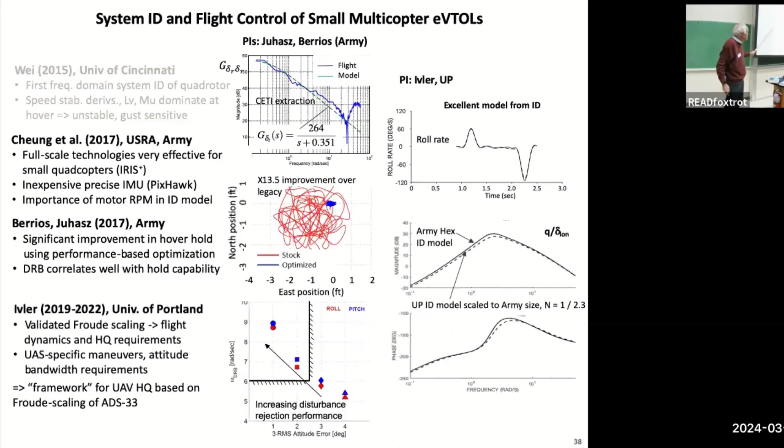A lot of work has also been done by Ivler, who was one of my employees and one of my students. Now he's a professor at the University of Portland. One of the things he did was validate Froude scaling.

Froude scaling has been around for a long time, since the 1920s. Basically, it allows you to take two aircraft, a small version and a large one that look the same but are shrunk, and it allows you to scale all the stability and control derivatives and characteristics.

So first she identified a state-space model of a hexacopter, a very small hexacopter, and you can barely see where the ID and the flight data differ. This is very large motion, plus or minus 120 degrees per second. So this is a small hexacopter.

Then at the Army, we had a larger hexacopter, and she scaled her aircraft using Froude scaling and the derivatives up to the same size as this large hexacopter, and lo and behold, the dynamics matched. What that means is it's a very powerful result.

This means you can take handling quality specifications from full scale and scale them down to smaller vehicles like eVTOLs, or even these small vehicles, and vice versa. You can build a scale model of an aircraft, as long as it has the same geometric characteristics, and scale it up to a larger scale. This is a path forward for companies wanting to develop these flying taxis, starting out using subscale models. So this works extremely well.

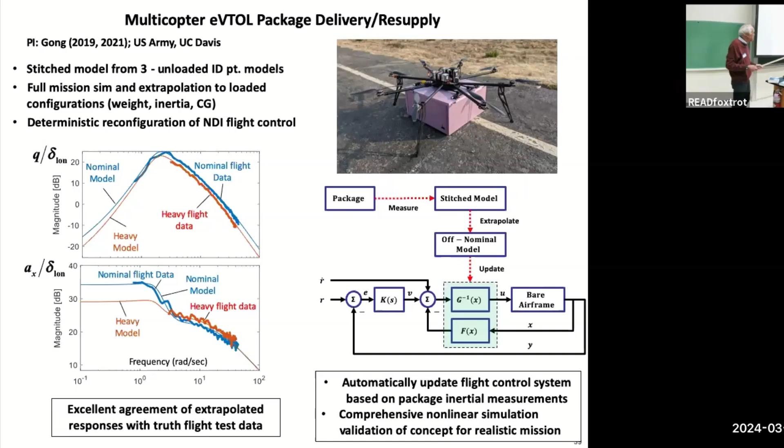So instead of it being adaptive, real-time adaptive control, which is not deterministic, this is fully deterministic. You get the same answer every time. It's a big deal, and it's a way forward for this sort of application.

There are many additional highlights. At the Army, they developed an approach called the joint input output method, which allows you to determine the control authority of individual actuators, individual rotors. So you have some of these eVTOLs with many rotors, and you want to know what their individual effectiveness is, and that allows you to do that.

We've come up with turbulence models, and I've worked a lot on looking at how to extend these steady models, which are for a single main rotor, to multiple rotors. There's been some experimental work done as well.

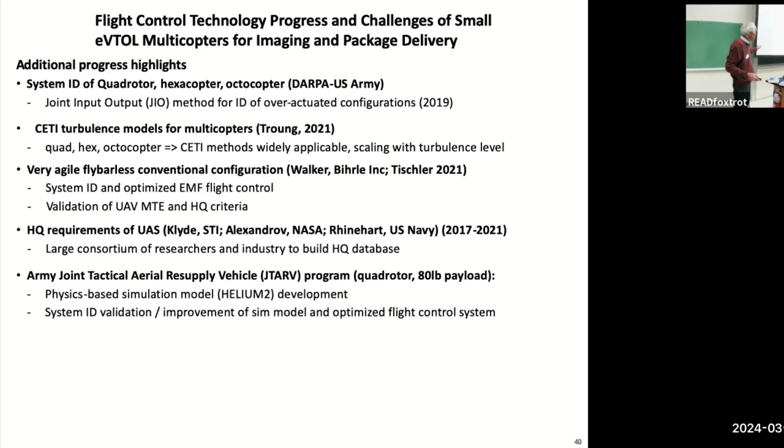There's work on very agile configurations, and work being done to develop a whole set of handling qualities requirements like ADS-33, but for unmanned aircraft. And then there's an interesting Army program on a fairly large aircraft that carries 80 pounds, where we're going to look at physics-based models and systems.

But there are so many challenges. These multi-copter vehicles are dominated by these speed derivatives, which makes them very sensitive to turbulence. But you want them to fly in conditions of high turbulence, so that's going to be a challenge. The physics-based models are not ready for prime time.

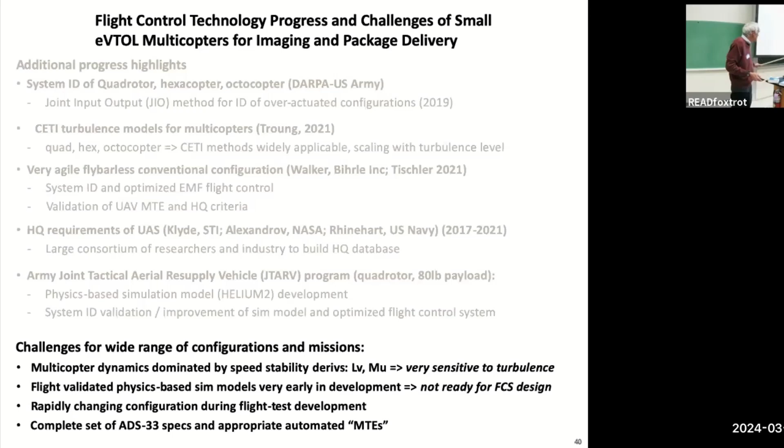The configuration just doesn't agree with the theoretical assumption. These companies change rapidly—you go to some of them, they'll flight test it one day, crash it, change it, fly the next day. There's no way for physics-based models to keep up. But you can go out and do frequency sweeps and identify new models just like this. So there's a challenge to come up with these models.

The next class of aircraft is really what's all the rage now—this whole family of vehicles called eVTOL, for advanced air mobility and urban air mobility, or so-called flying taxis and cars. These are some of the aircraft that are already flying. A couple of years ago there weren't so many; they were just on the drawing board. But now you can find YouTube videos of all these aircraft flying. Here's one in China, and this is one that's still on the drawing board but being constructed right away.

There are about 300 of these developers worldwide, and the Bay Area is one of the hubs for it. In fact, the two leading companies worldwide are Joby, which is in the Bay Area, and Archer, which is in Santa Clara. Archer just got a pre-order from United Airlines. So this is serious stuff. And you can see they're all shapes and sizes, including some for package delivery.

NASA has a big research project called the NASA Revolutionary Vertical Lift Technology program. They're looking at physics-based models, flight control design including specifications and quality requirements, subscale flight testing, and developing new physics-based modeling tools. There's also an international working group trying to come up with best practices. There's not a whole lot of published data yet, but NASA is doing some basic research in the vertical motion simulator using a kind of generic flying taxi.

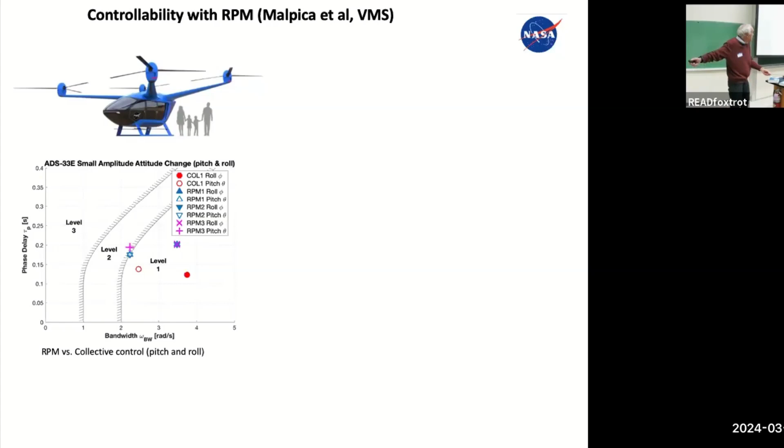It has a lot of advantages, but it has to be applied carefully. We need accurate models of the engine, RPM, and powertrain, which are really important to get the design right and be sure you can fly right close to the boundary. There are big differences between using collective only versus RPM, and some researchers are looking at a hybrid solution that uses both RPM and collective to give a little more bandwidth, while still having the advantages of RPM.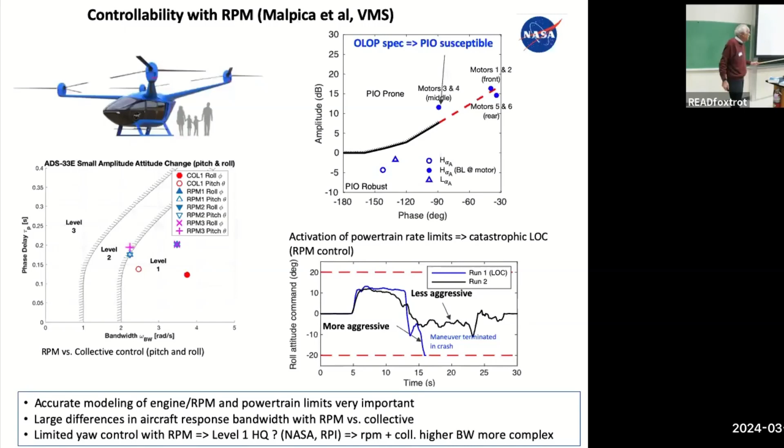There's work done in the wind tunnel at small scale, as most aircraft are put in the wind tunnel at small scale. This is to characterize the engine RPM dynamics of one of these quad rotors—it's a quad rotor, but each arm is a coaxial. This is the TRV 80-pound lifter I talked about before. So you can sweep in the tunnel, get a model in the frequency domain, and then you can see that the model predicts the response extremely accurately.

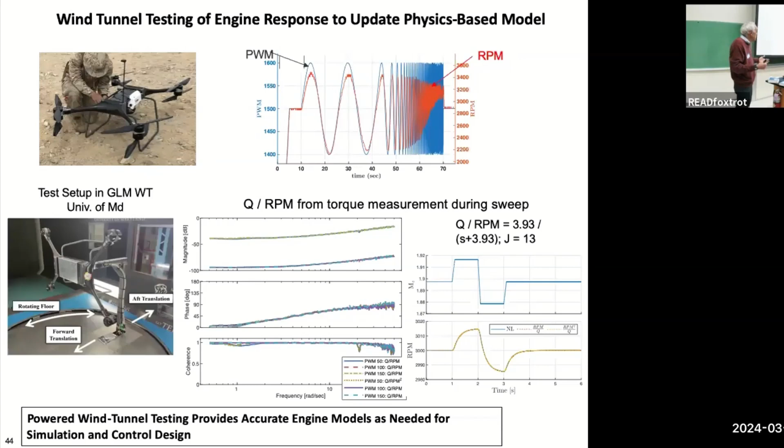This is a way in which you use wind tunnel tests and ground tests to characterize engine models. This is pretty ubiquitous these days—people developing these electric propulsion systems will set them up in a hangar, do a sweep, and characterize the aircraft's RPM response. Because as we just saw in the previous slide, understanding the RPM response is critical to being able to predict handling qualities and do a control system design.

So this shows the power of this sort of Froude scaling — not only taking large scale handling qualities down to smaller size, like these eVTOLs, but also upscaling from smaller scale things. It gives you that path in both directions.

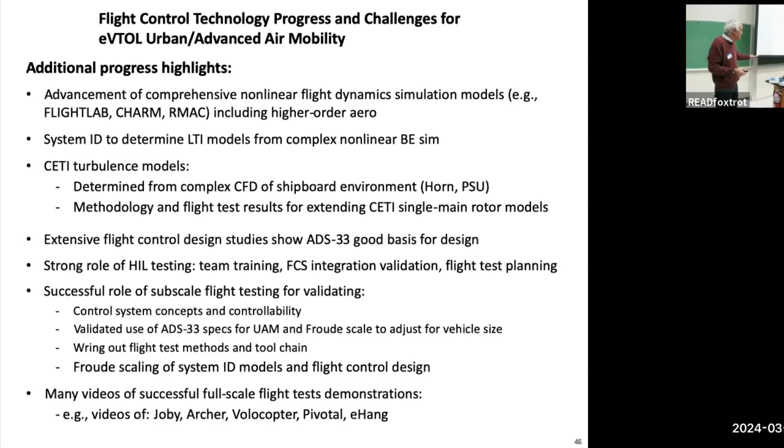But there's no hard data available — nobody's going to publish their data, so that's tough. But they're out there, and I can assure you, if you're graduating now into the job market — once upon a time when I came to the Bay Area, the only place to work in aeronautical engineering was NASA or the Army. Today there's just this buzz of activity. Probably the Bay Area is the biggest single developer of these eVTOLs, and they're all looking for flight control expertise, so there are a lot of choices.

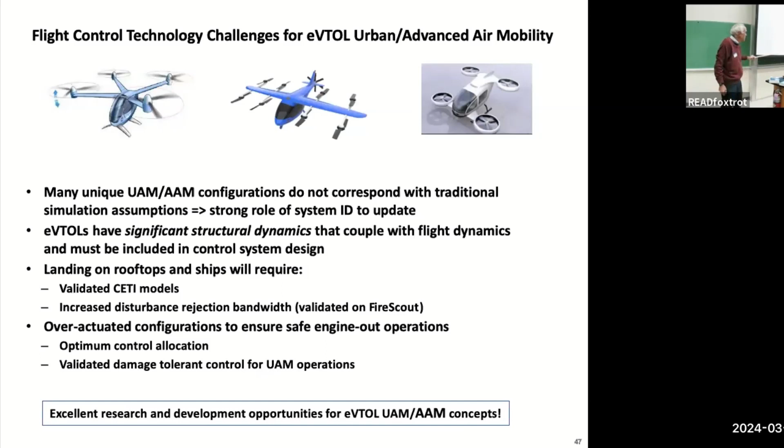There are many challenges across various kinds of configurations. Many unique configurations give a very strong role and system identification to update the physics-based models. There's a lot of structural coupling because these vehicles must be very lightweight, and often their rotors are way out on the wingtips, so structural flexibility comes into play. You also want to land them on rooftops, they tend to be over-actuated, so you have to worry about control allocation and damage tolerance. It's still a great research area.

So we're getting toward the end here. This slide will summarize all the various challenges across all these modern aircraft. I've been talking about the future aircraft and looking at the solution space.

So the first area is the need for handling quality requirements, and a good solution space is these new handling qualities specs populated with some of the new flight test data, and perhaps parametric studies from research institutions that have suitable aircraft or simulation experiments.

The next area that needs to be addressed, the challenge, is validated physics-based models for a wide range of configurations. Here we can augment things like higher order aero, advanced inflow dynamics and CFD, as well as CETI models of turbulence.

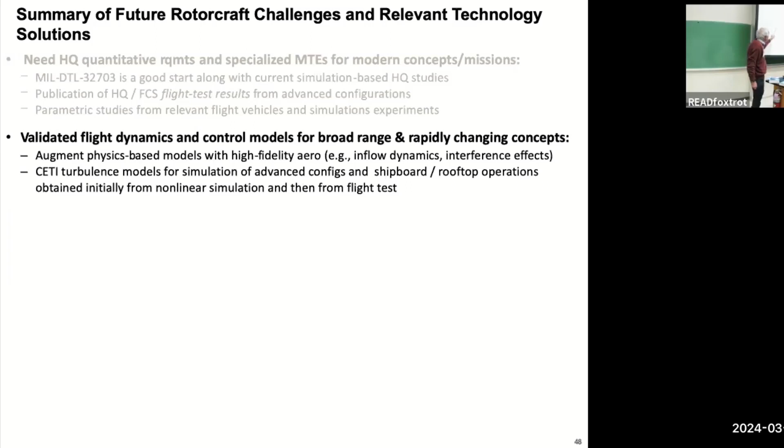The next challenge is these highly compressed development schedules. When they first started talking about eVTOLs or flying taxis, this was maybe 10 years ago, and they said they're going to be operating in the next 4 or 5 years. Well, that was 10 years ago, and they haven't even made it through FAA—nobody even knows how to get through the FAA process. So they're going to be a while.

So the only way they're going to get out the other end of it is to use tried and true methods: system identification early on to document the vehicles, use subscale demonstrators and good scaling to try to cut the development time, because it's going on and on. But now they're saying the vehicles will be in service in 2 years. I don't know—I've got a great story on that.

There are many challenging flight control problems, many unique configurations, and here's where tried and true, well-vetted flight control architectures like explicit model following and multi-objective optimization are going to work very well. So in each case, the technologies I've covered, developed over the last 30 or 40 years, are going to hold us very well for these aircraft concepts.

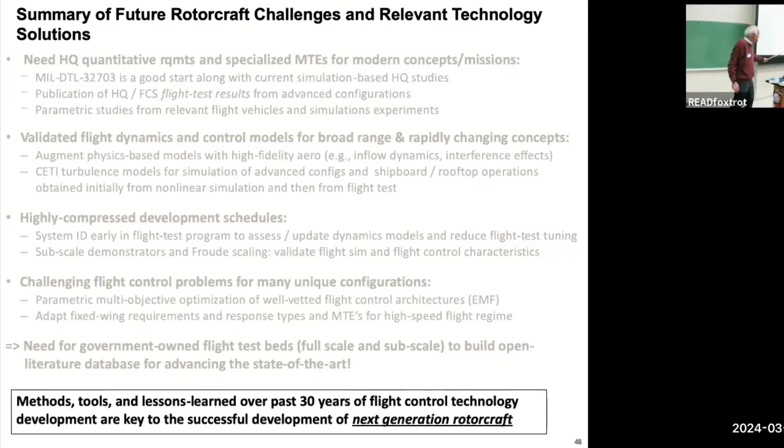And finally, there's a need for government-owned flight test beds as well as simulation. Overall, the methods, tools, and lessons learned over the past 30 years are going to be the key to developing flight dynamics and control for this next generation of aircraft.

So students should learn these methods, because when you go to interview, I can assure you they're going to say: what do you know about system ID? What do you know about cyclic control? What do you know about flight control design? What do you know about handling qualities? And I'll ask you that too. So learn a little bit of it—read a bit in my books, or take one of the classes, or try some of the stuff.

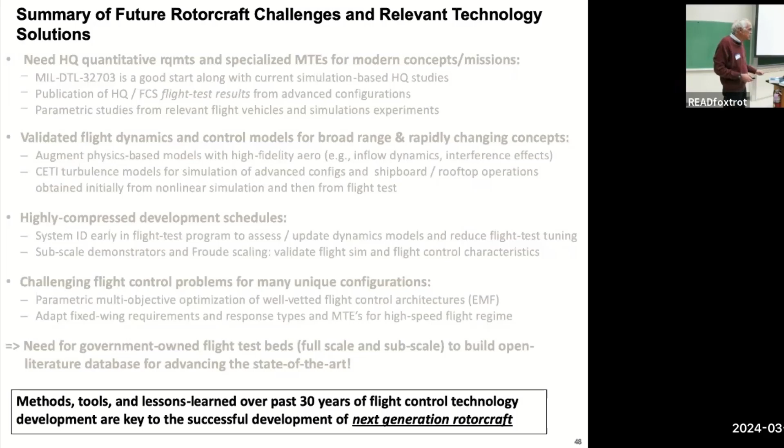That's one big lesson. The next big lesson learned is you've got to turn your theory into usable software. In the old days, people would come up with an equation, show that it validates the data, and say, okay, now it's up to you to develop the software. It doesn't work anymore—the software is very sophisticated. So we turned system identification into a software tool called CIFER, and I did a book on it.

We came up with lessons learned in flight control, and I documented that in the book, as well as a tool to do automated parameter-based optimization for control system design—and again, wrote a book on that. And then there's another tool, just using a stitch model, which allows you to take the point model and fine tune it. So we have not only the software, but the textbooks and the training books.

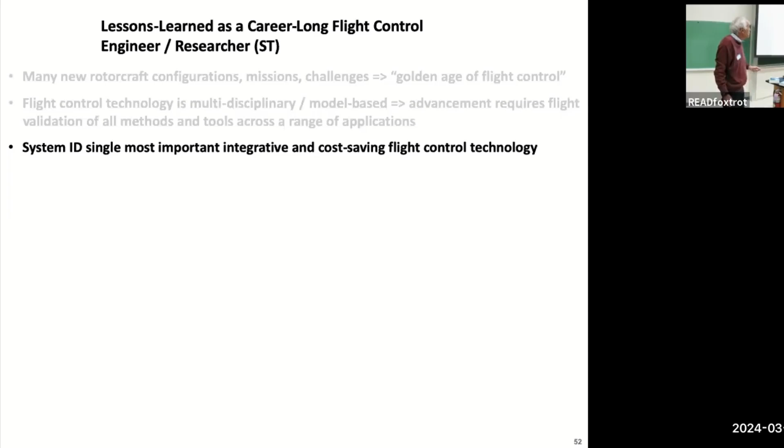System ID is probably, and you've seen it over and over again, we talk about how it's used, the single most important integration tool for cost saving in flight control. It's something you really should learn.

Advancement is a nonlinear process. Sometimes it's cross-fertilization from the fixed wing community to Rotorcraft. Other times you develop something that sits on the shelf, then you go back and review the literature and find somebody tried this 20 years ago. Let me try it again, maybe things have changed and it's faster. So it's not obvious a lot of times where you're going with these.

Fielded applications can take a long time, maybe 10 to 20 years. CIFER and CONDUIT took between 10 and 20 years each. Long development cycles for big breakthroughs, but eventually we get there.

Collaboration is key. Interacting with other researchers, going to conferences - it's not only about writing the paper, but meeting people and getting your name out there. You get what my colleague in Germany used to call the aha moments. You get away from your computer, go to a conference, and all of a sudden you go, oh, that's how we did it. Maybe I can apply that to my problem.

True technology transfer takes a lot of effort. You've got to have validated methods, papers, good courses. Flight control advancement requires us to be more discovery driven and less strict.

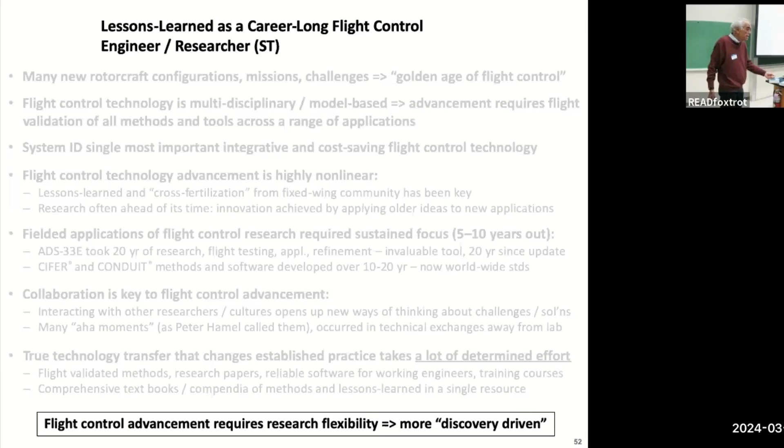Finally, some acknowledgments. I had a lot of mentors in my career, and I was blessed by that - that's really key for all of you. I encourage you to reach out, look around, and ask. Try to find people, go to conferences and go up to somebody and say, tell me about your career, how did you get doing what you're doing, what was your career path? Because as students, and when I was a student, I had no idea what a career in aerospace, especially in flight control, meant. No clue. So I had many terrific mentors over my life.

Probably my dad was my first and most important mentor, and he would always say, if you're good at what you do, you can always find a job. When I started in school, the aerospace industry was in full decline, and I was worried about studying aerospace. I said, you know, if you're good at what you do, you'll always have a job. And I got out, and the aerospace industry was booming, and I needed more job opportunities.

There are many folks here, and I encourage you to reach out and find mentors throughout your life. Wherever you are in your career, find people that have been there before that can help you not only with technical decisions, but also career decisions.

Aerospace and aeronautical engineering has been my life since I was 12 years old. I tell people who want to get a PhD, I say, if you were born with an airplane in your mouth, get a PhD. If you weren't, you can study robotics as well or mechanical engineering - you may want to be broader. But it's been a passion of mine since my earliest days, and it's been possible through my career in the Army and many research collaborations with industry over the years. Now I'm working on my own, over a very long period.

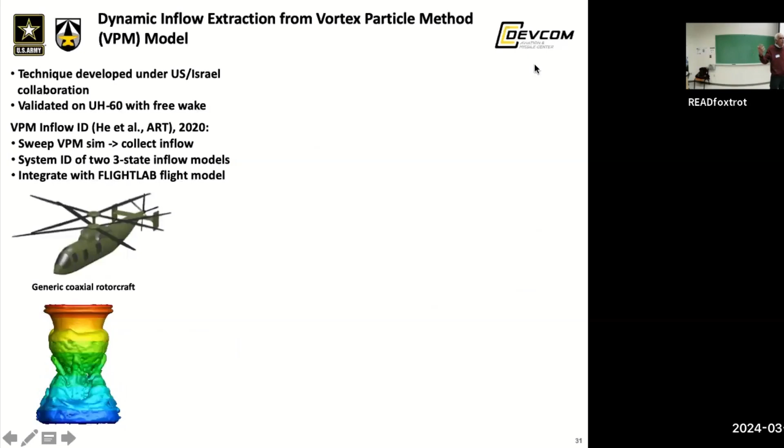Yes, sir. No, thanks, Mark, sure, for explaining that. So I have a comment question—it's going to really reflect the results. I think you may want to explain with the X-56.

Tell the folks what an X-56 is. The X-56A is a body freedom flutter vehicle. It's designed unstable, it has a first wing bending mode—a very flexible machine with a lot of surfaces to control.

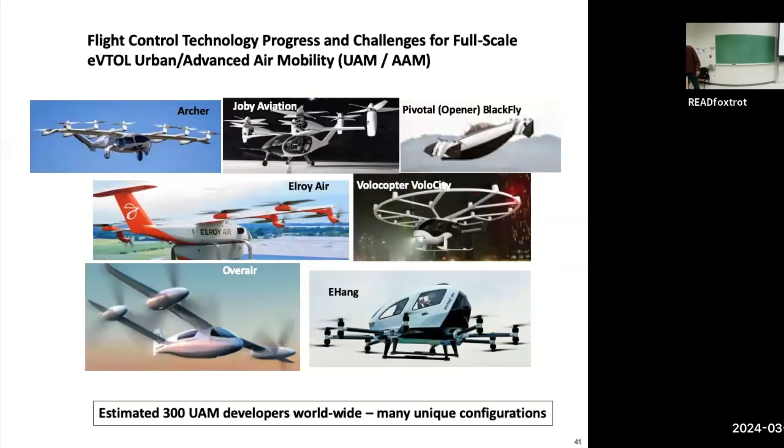Yes, I mean, you can do both, it's not either or. I just wanted to get to the end here, but yes, you should be able to update your physics-based model. But at the end of the day, what most companies do is they walk away from the physics-based model because they have a model which is much more accurate. And we've done it both ways, so I agree with that.

Other questions? Other comments? Sure. Yeah. Yes, well, I wanted to ask, do you think complexity - do you think there's a benefit?

Oh, everybody's driving toward full autonomy and these flying taxis. Originally when they were going to field them in 3 years, they were going to be fully autonomous, take the pilot out, right? We're not there yet, but that's still their intent. And I just saw where the DoD dropped and canceled the piloted Kiowa replacement called FARA, which I mentioned - they're saying now it's going to be sky wars, drone warfare. So yes, there's going to be a role for small and very large UAVs without a doubt. I mean, you see them everywhere, in all the modern conflicts, as well as...

But look, people ask me about this and it's a good question. Five years ago, we didn't think there were going to be autonomous cars. Now there are robo taxis in San Francisco that regularly get stuck, and they need somebody in the ground station to say, oh yeah, it's a construction zone, you should go around. Or every once in a while they hit a pedestrian, and that's happening. So now we're going to do this in 3D - we have maybe more space, but there's nowhere to pull off the road. So is it coming? Yes, eventually it's going to be reliable. Is it today or tomorrow?

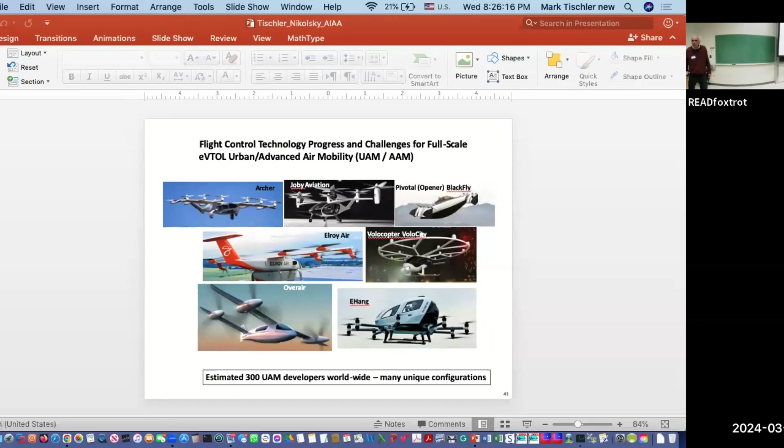Other thoughts, comments? I was going to say it's going to be interesting for pilots with these results because it's pretty uncomfortable. How would someone justify that? Right, yeah, it's a challenge because the pilots now, talking about getting people who used to fly video games, not so much sticking with it.

Probably not. That's the thing, you're always going to have a pilot, but it's coming. There's going to be some mix of automation, no question. If you look at some of the conflicts that are ongoing now, military is always the leading edge. Eventually, all the autonomy stuff we're seeing now was originally developed by DARPA and the military, and now it's being developed by students. So it's always that way.

But there's everything - cheap drones are having a huge impact on applications. They're already being used for things like photography and real estate. And they're everywhere - you can go out and buy very sophisticated drones.